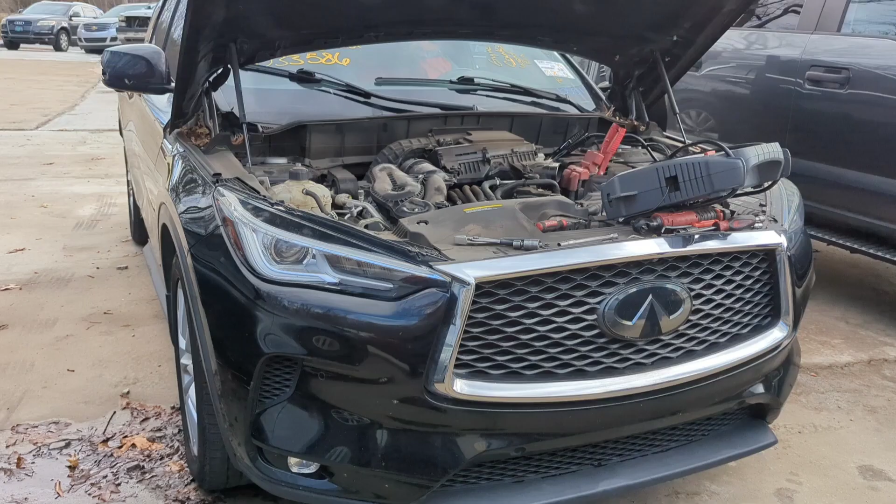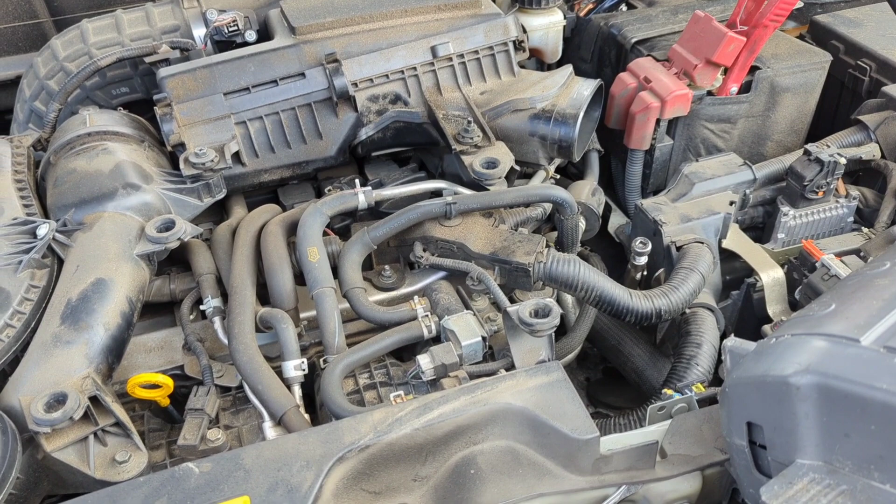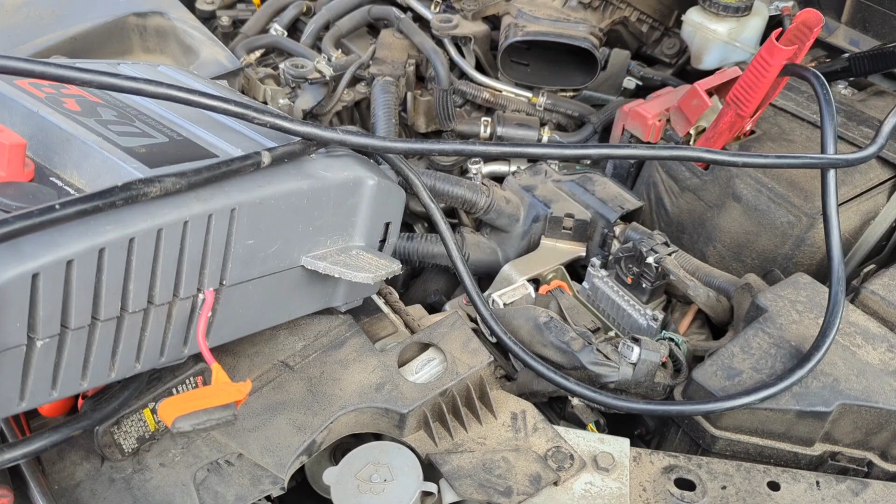2019 Infiniti QX50. We have to replace the engine. The engine's locked, and there's no way to get this thing into neutral other than messing with it here. We're still trying to get it to neutral so we can push it and take it into the bay on the lift. So I'll show you how to get this thing to neutral.

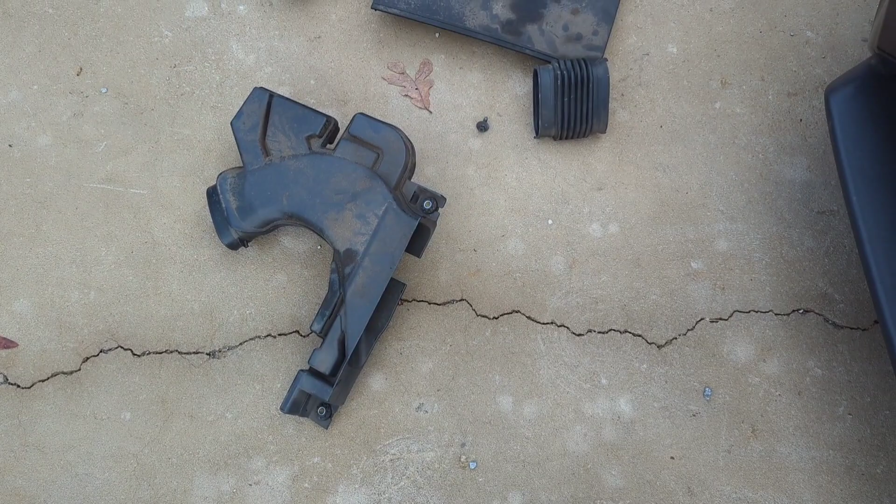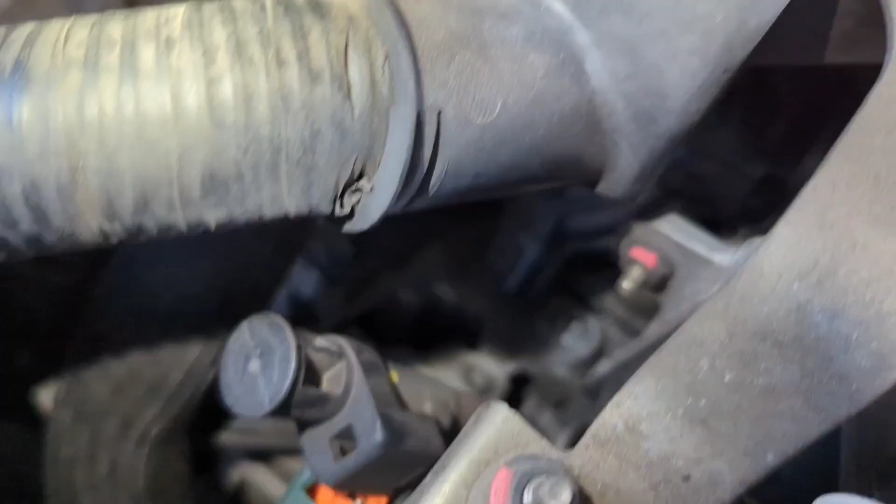So far we have removed the air cleaner duct or hose, and we're trying to get to the shift actuator, which is on top of the transmission. We are taking a vice grip to connect to the top of it. So the shift actuator that you can see right there has to be removed, and we attach a vice grip to the top. I don't know if you can see it.

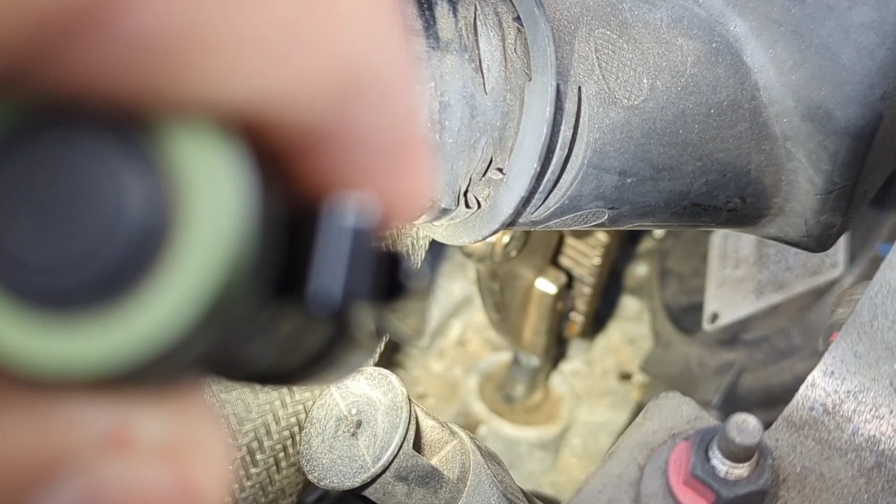Right there is where the top of it is, that's where the vice grip is attached, and you just spin it counterclockwise to get the car into neutral.

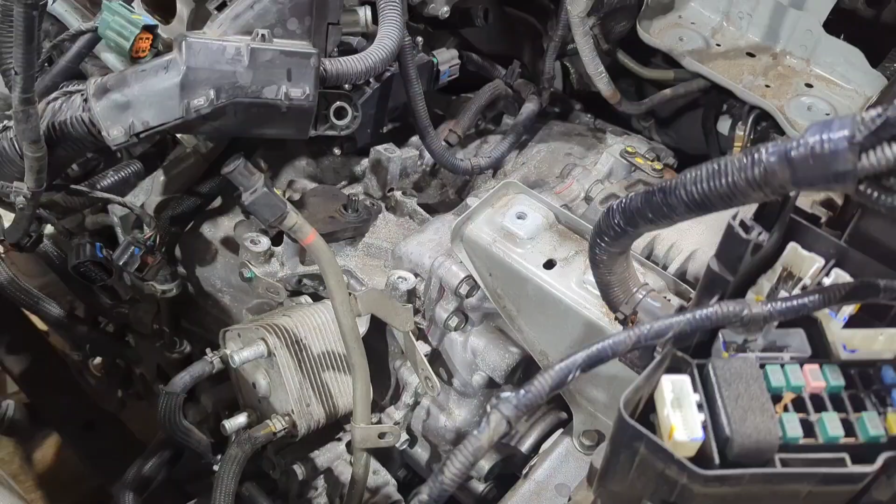So we got it in neutral. Car is moving. There's a better view of that latch.

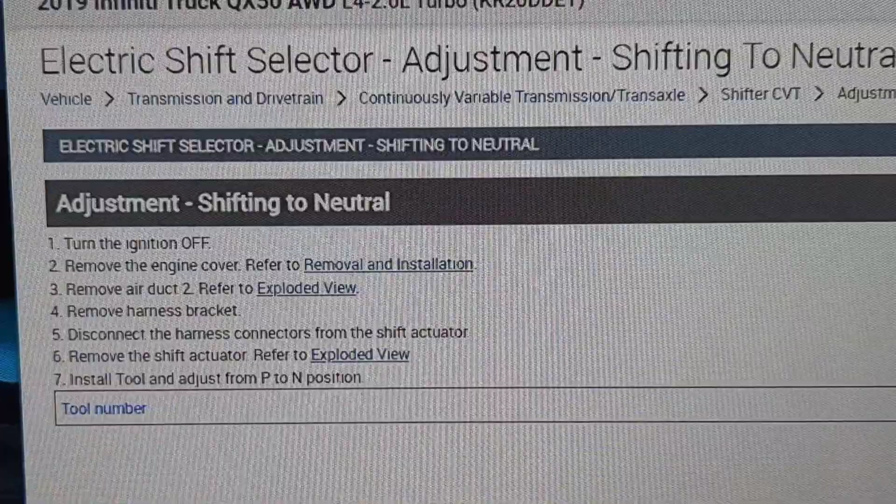Since we got the engine out, we're working on the engine replacement, and a lot of the stuff is already out. So these are the official instructions on getting the transmission into neutral. Basically: turn off ignition, remove the engine cover, remove the air duct, and there's the diagram for that.

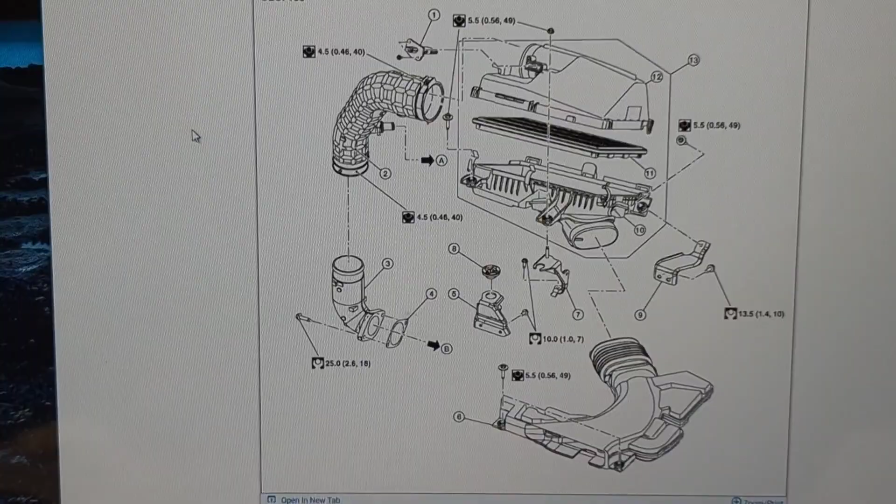Let's see. The harness bracket has to be removed. Disconnect the harness connector from the shift actuator, and you actually have to remove the shift actuator. Let me give you the view for that right there.

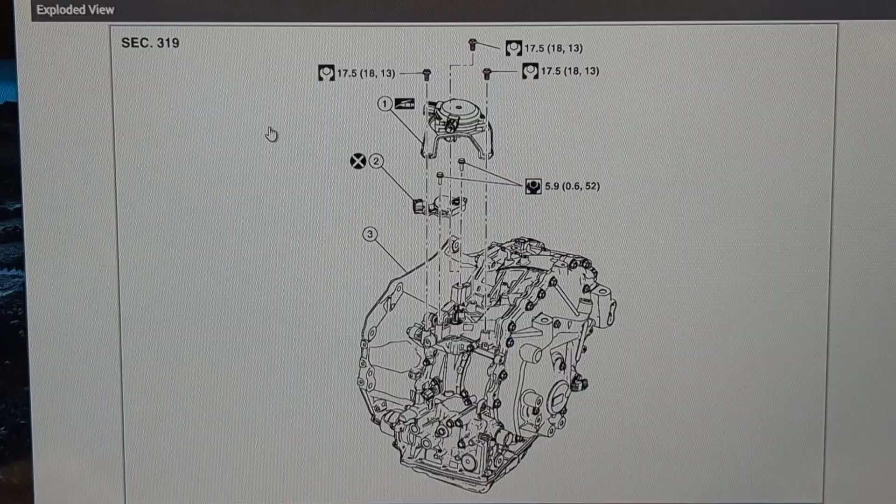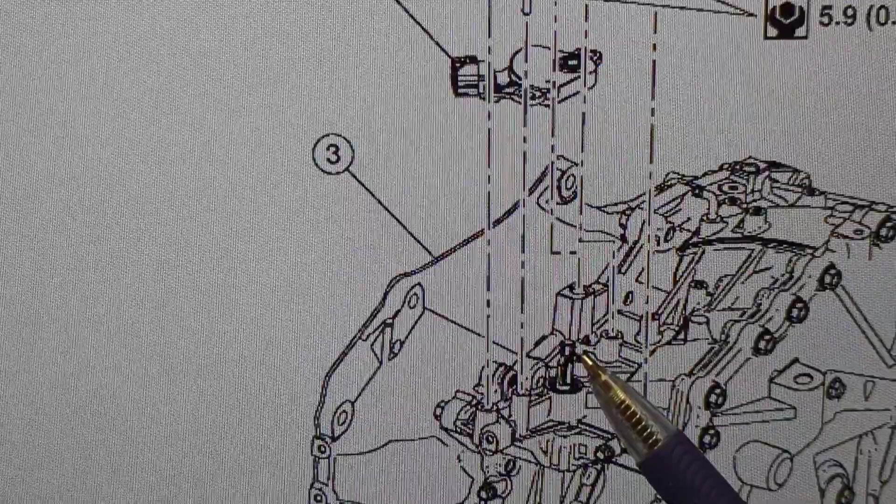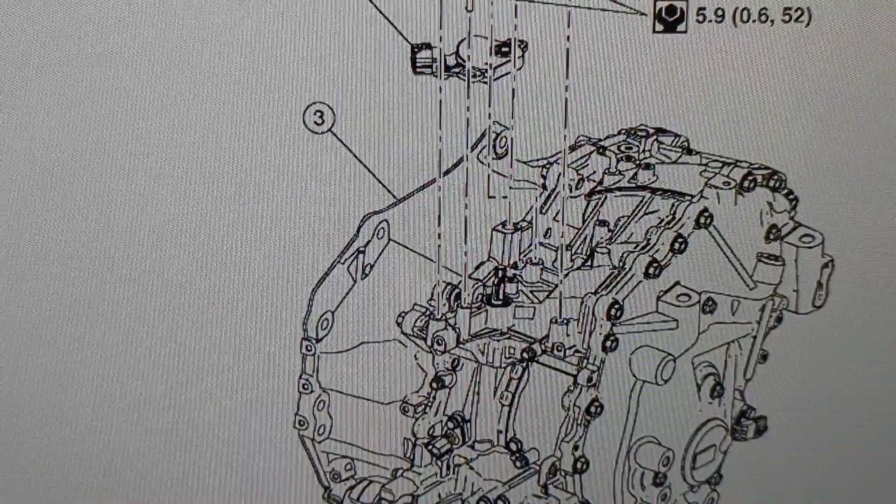This is the shift actuator right there. Once it comes off, there's a little latch or pin pointing out right there. That's where you attach the vice grip and turn it to get it into neutral.